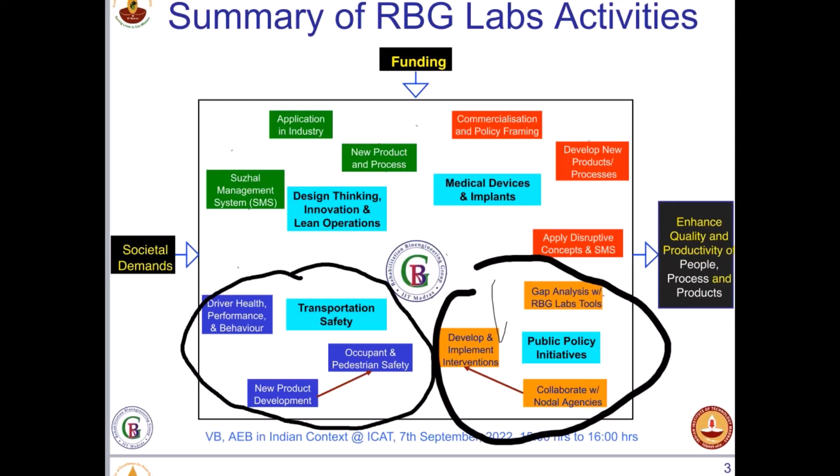I think for some reason the slides are being projected from your platform, and in that process it's taking away some of the things that are written. But anyway, okay, so organizers, could I just drop off? I'm going to make a PDF of the slide so it becomes easy to project, because the document is not coming out right. I'm going to drop off and come back in.

In the meanwhile, if I can have a quick spread in terms of what are the things that excite people, I'll be happy to take a look at it.

Yeah, I think I will have to drop off.

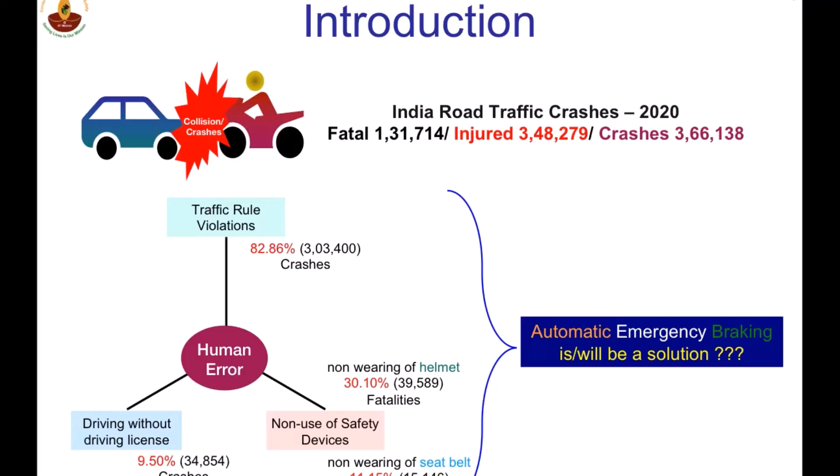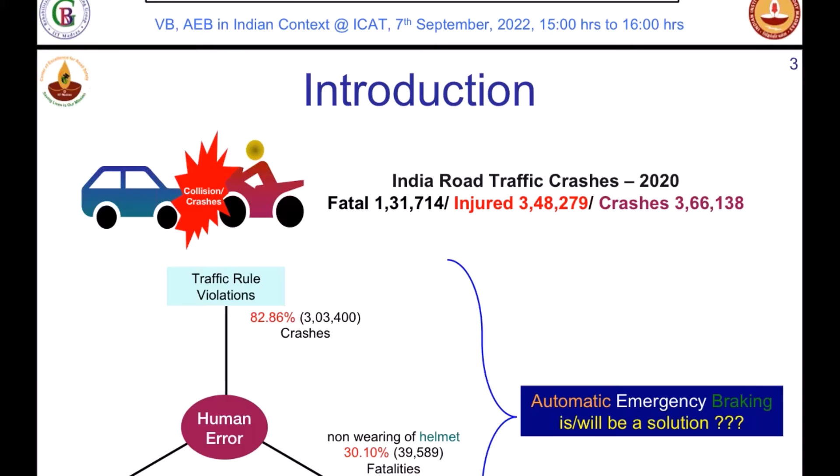So roughly we operate with a number - although we project this, we operate with a number that we have about 5 lakh crashes in the country. Now, a large chunk of it has been associated with human error and traffic rule violations that needs to be there.

Now, there are other issues like non-wearing of helmets and other compliance issues, driving without license, and other things. Now, a question that this PSL team had brought across and we were thinking about was...

for these kind of violations, which actually lead to a large chunk of accidents, whether this AEB is going to be a solution, or AEB is just going to be a technical gizmo for engineers to project about. I just wanted to set up the framework that is there.

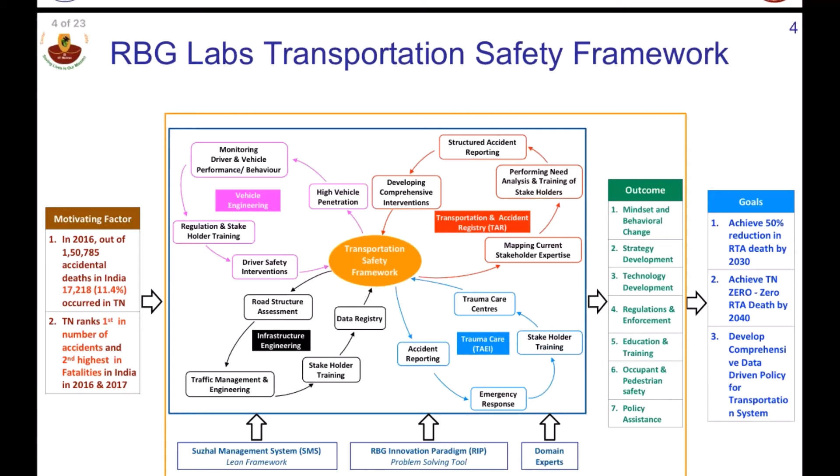So it all starts with something that we started about. Whether the data is right or wrong was not clear. It's not clear what's the vehicle engineering side. There is work to be done in infrastructure engineering and trauma care.

So basically, road infra engineering, human engineering, road engineering, and data collection - all these three things is the essence of what we need to do. Is the safety framework we built. We started asking these questions to see how we can reduce crashes and other things.

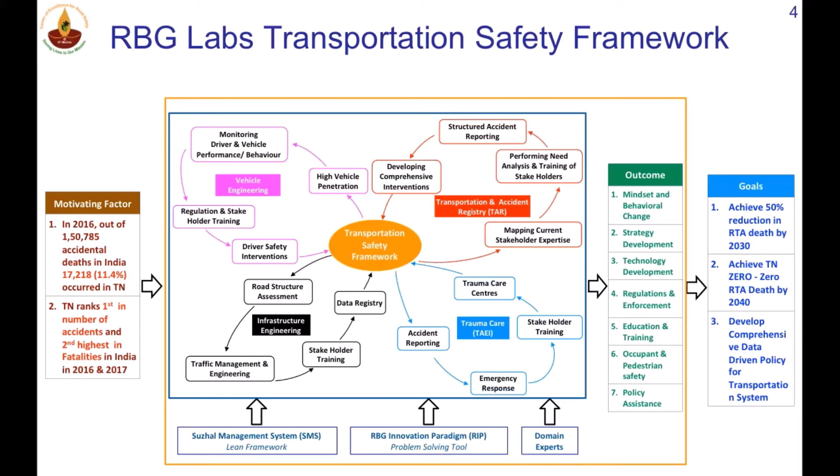So we run a program called the IRAD. Now it's called the EDAR, for collection of crash data and things of that sort. But more importantly, we are also a center of excellence for road safety, where we look at many things.

One of them is the knowledge sharing work that we tend to do, and make sure that we are able to share things that are going to be useful for many - and that's definitely an area of interest for us as we go about.

Now, we come back to the short thought of what is an AEB. There is a...

myth that all of us tend to believe - that if a car can actually detect what is there on the road and do all the activities that are expected, and becomes autonomous by itself without any human intervention, we will then get into a safe space.

So there is a significant amount of investment that goes into it. There is a lot of impetus and spend that happens to create autonomous vehicles.

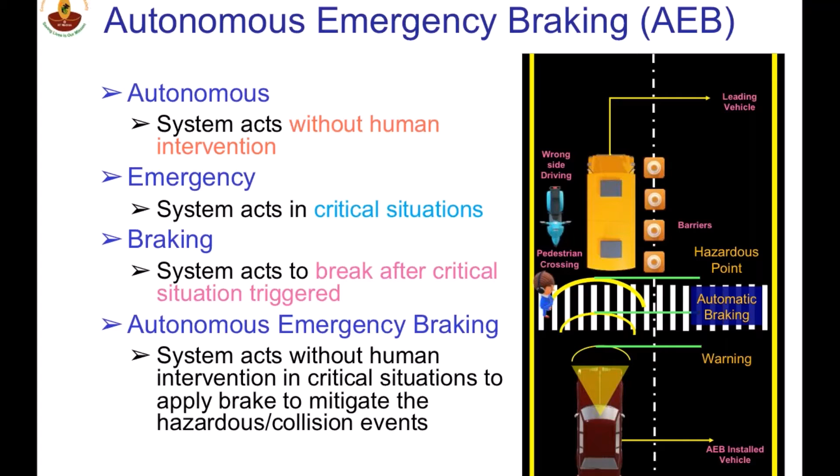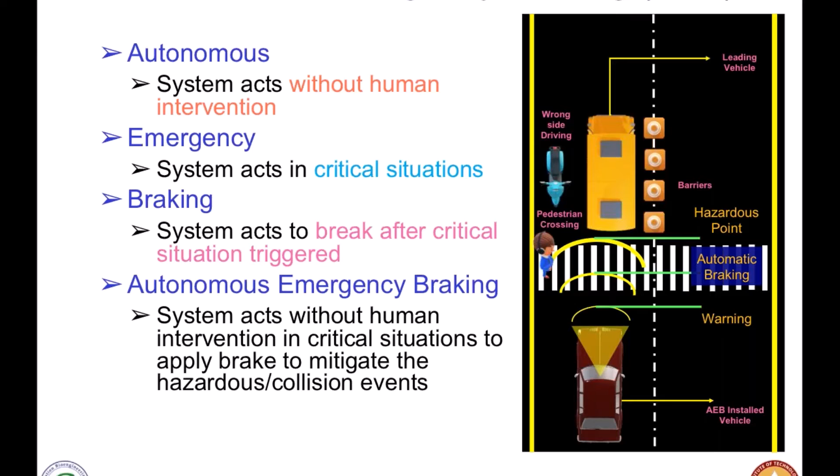So autonomous vehicles are a bunch of systems that act without human intervention. That is what any autonomous system is. The emergency is when there is a critical situation that arises, and braking is to brake when a critical situation is triggered. So the whole idea of autonomous emergency braking is, if there is a critical situation that comes out, and there is not enough time for a human being to react.

Now, what is the time for a human being to react? If there is a signal that is given to an individual... I'm trying to get the pen to write. Let me see if it writes.

So there is a processing unit and a sensing unit, and the actuation and sensing are usually nearby. When information goes out from the sensing unit and gets processed, and then an actuation signal comes out, there is a time lag that happens. Typically, this to and fro time lag is said to be around 600 milliseconds for a healthy adult. Now, 600 milliseconds is quite a bit of distance, distance as in the distance traveled in that time. In that time, how much distance the vehicle would have traversed on the road.

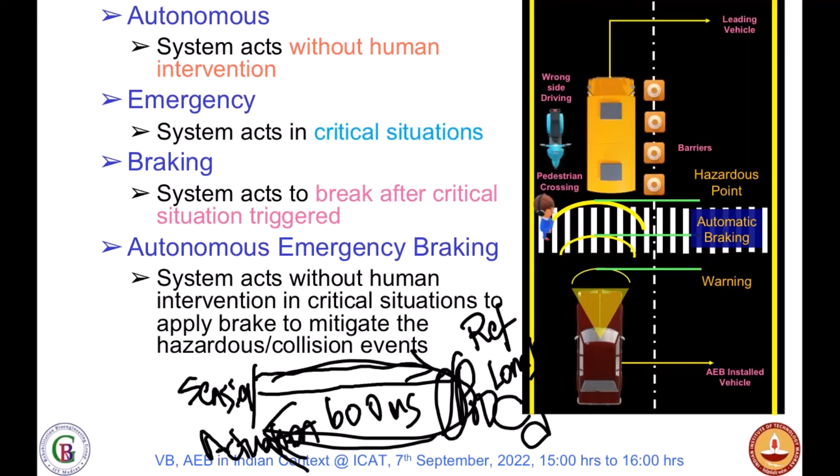Now this processing involves two kinds: one is reflex, one is computation then decision making. If it is a reflex, then it is 600 milliseconds, start, go. If it's some level of computation you have to do to arrive at a solution, maybe a little bit more is added. But once you push into the territory of decision making, it becomes an extremely difficult task, for the simple reason that the human body's decision-making part is a challenge that is very difficult to mitigate, because all of us are indecisive. We tend to be fairly indecisive in whatever we try to do, whether we're good or bad at it, we tend to be very poor in decision making. So the time lag takes significantly longer, and as the decision-taking time increases, it creates significant other issues.

Unfortunately, I did not know how to do an erase in this tool, so I decided to do the undo to erase it.

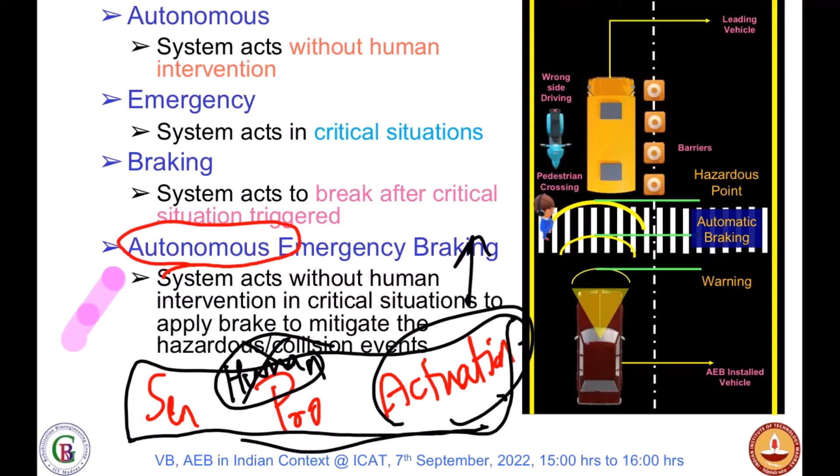Anyway, so what engineers try to think is, let's not worry about this, let us actually start looking at removing the human in the system, or removing the human from the loop. So there is a sensor, the processing, and the actuation that needs to be there. So there was this black hole called the human. So we remove it, then it happens within the machine itself. You sense, you process it, and you make the actuation. Now, the actuation part is the braking part, and sensing is what you sense for the emergency, and you want to build autonomy in that and take it forward.

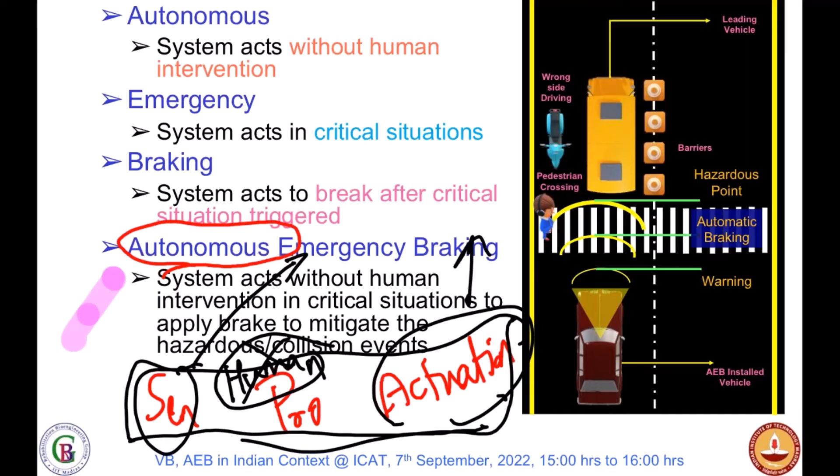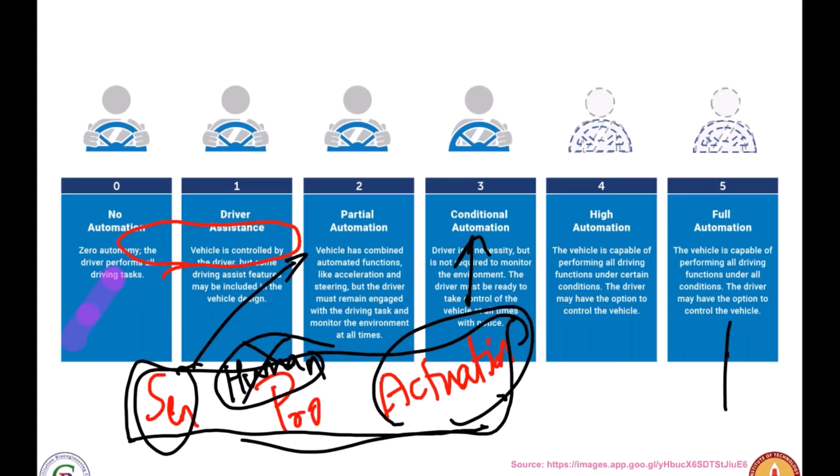As I said, I want to take this from first principles, take a look at it, and then go into it. In vehicles, over a period of time, we all love to create, we would want to be absolutely certain about what levels we create structures in. So creating structure is something we all love to have, and to create the structure, the good old traditional car, which is fairly plain vanilla with no automation, your Model T from Ford, to many of your first cars, most of you would have seen better cars since.

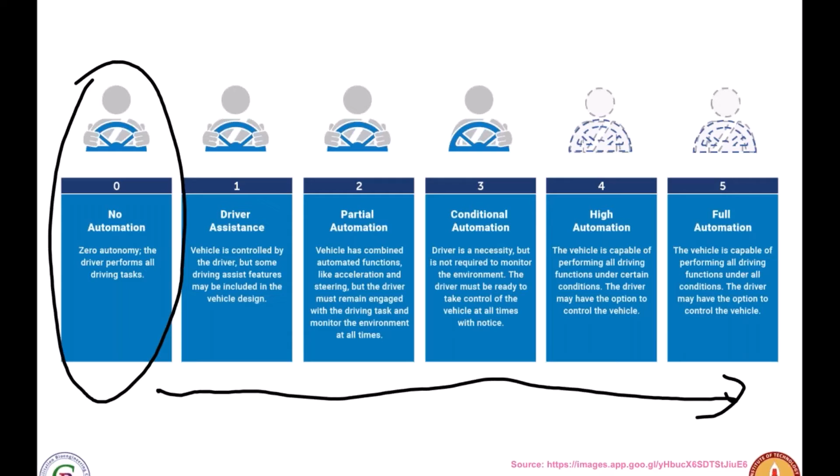Over a period of time, you start asking what kind of driver assistance you would want to add, where the driver is still in control, but you start giving features that can help the driver decide what needs to be done. So there is processing by the human, there is human involvement or intervention. Now you go a little further and say, I won't ask you all the questions, I'll ask you some questions, and you can answer and still work with it. Functions like acceleration, steering, something like cruise control, which are partially automated.

Then you start bringing in conditional automation, where the driver is not required to monitor the environment, and the driver must always be available to step up and take over control. So all these have the driver in the loop. Now you want to add a bit more automation: the vehicle is performing most or almost all of the driving functions, and although the vehicle can work on its own, the driver can always step in and start controlling the vehicle.

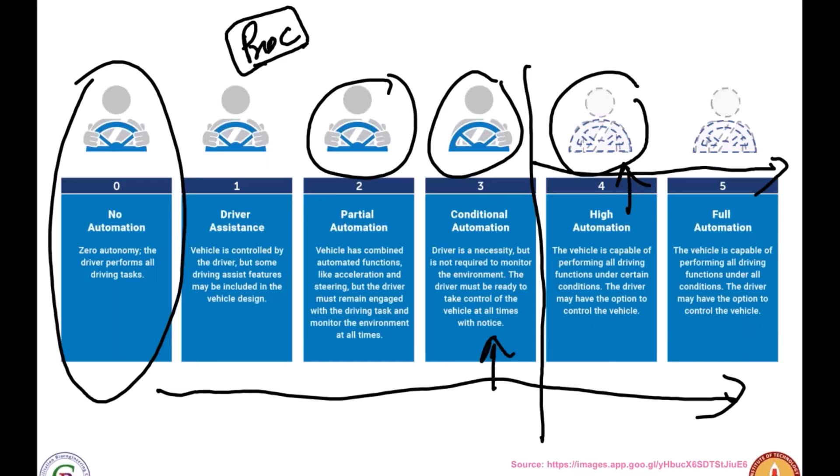Of course, when you go full on, it's a driverless car, which is kind of the holy grail that many would want to approach and then get into. Now, where does AEB fit into it?

Many times people always talk about the acceleration that your vehicle can bring about. But injury and failure does not happen because of acceleration. That happens because of the deceleration, right? So how fast you brake, and whether you brake on your own volition or you're being braked by extraneous factors. Injury is not due to acceleration, injury is always due to deceleration. And in the deceleration, if it is not controlled properly and the systems within the vehicle are not working together, then you are in a big soup.

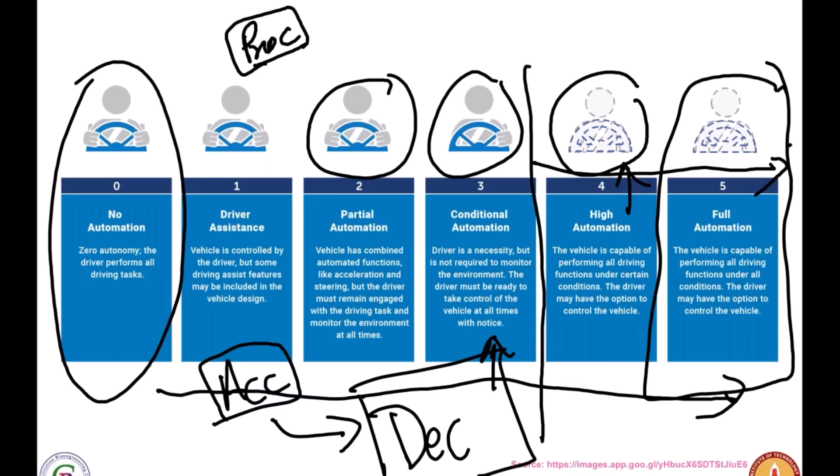Therefore, this entire braking business becomes a... okay, now I've figured out how to erase all drawings.

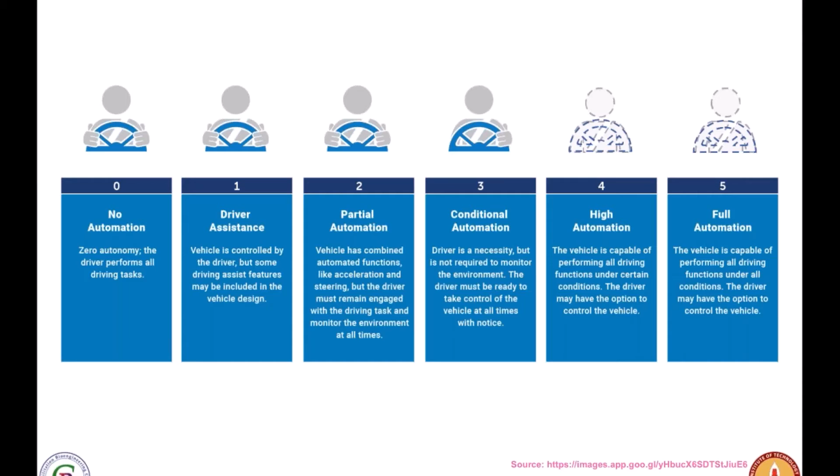So it becomes much easier, and it becomes an easy thing to work with.

Now, the AEB as a system has been around for a very, very long time, it's not a new concept. It's probably in the late 40s and early 50s that people started looking at it, but most of it has been about reliability, bulkiness, and other things.

So again, you can try to correlate it with the availability of electronics and the improvement in electronics. It's not that people were not imaginative, it's because the science, or the electronics and computational power, had not moved further.

But with the advent of the 90s and 2000s, miniaturization of radar or LiDARs, laser-based detection, distance detection, and the reliability of this LiDAR. Today you can measure with a laser-based device for 10,000 rupees. You have laser guns which actually measure your speed, distance, and closing-in speed, meaning it also has Dopplers into it, and you can measure a vehicle that is going to move. A majority of what the cops tend to shoot at you to find out your speed and other stuff.

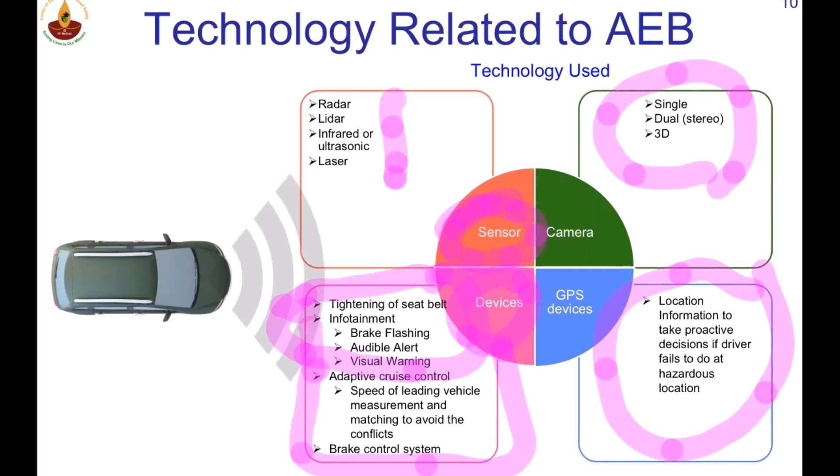All this is about the human in the loop, and then of course the vehicle-wise, the cruise control that you would want to do, and the brake control systems that you would want to get in play so that you can have good control of things that are to be done.

Now, like all systems, what is the good and bad end of the thing? The good thing always is, a vehicle, we can assume that the guy who drives it is an idiot, and the vehicle is smart, therefore smart vehicle will not harm the passenger. So we trust a lot on vehicles and the autonomy and the intelligence in the vehicle.

So the idea here is a vehicle cruising at about 60 kilometers per hour hitting a pedestrian has almost near certainty of death, compared to a vehicle that has been braking and not hitting the person at 60, at a lesser speed.

If a driver has missed a person who could be walking, or the intent of a person who could be walking, that leads to pedestrian crashes, head-on collisions, single vehicle crashes, rear-ending, as well as fixed objects. That's a single vehicle crash - there's an object standing there, not moving, and we, being arrogant, believe our vehicle can get the other thing hit and pushed open and go forward, but it won't happen that way.

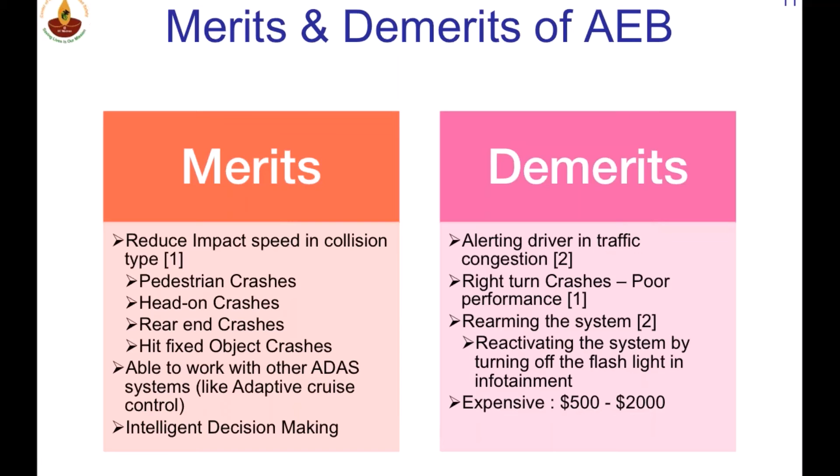We would spend a significant amount of money, but AEB will be an equalizer that would come about. Now, the talk is to make it mandatory by April 2023. Again, don't hold me to any of it - if you know a better number, I'll stand corrected.

AEB in an Indian context will be great for a lab level demonstration, but it will be a while before we can throw it on the streets. A bigger challenge in the Indian context is our human behavior - it's extremely complex to model and bring in. Basically, the AEB is going to work because you have built human behavior models, and those models or rules have to be obeyed. If that is not happening, we are going to be in trouble.

So the unavailability of the intelligent transport system also adds up to this challenge. Of course, there is climate condition that is unpredictable, and so on and so forth.

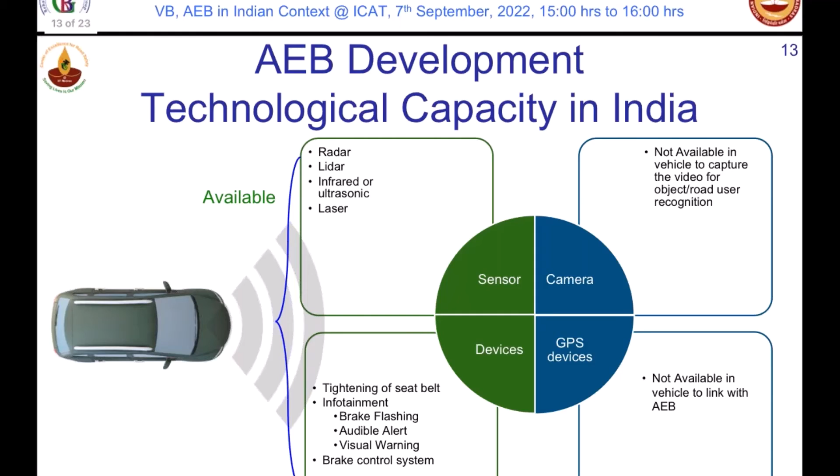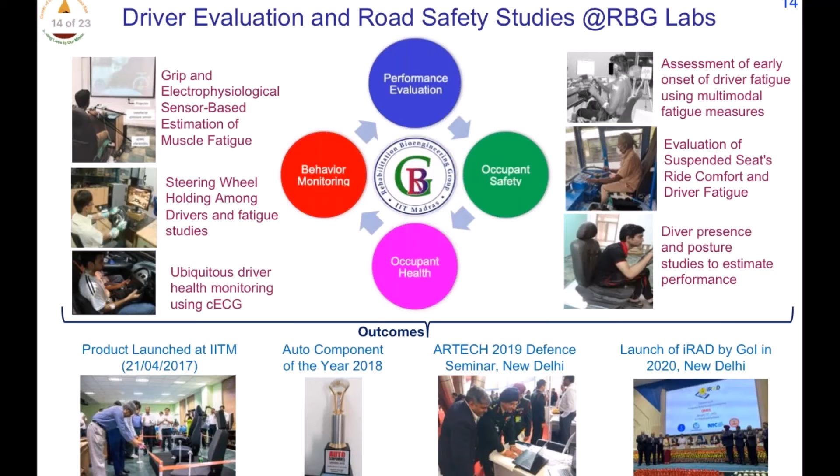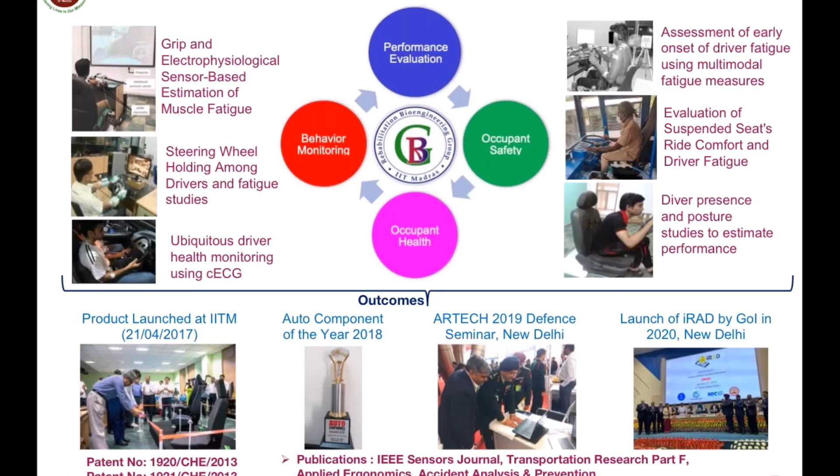Anyway, over a period of time, our lab has been working on the sensing side of the business, a little bit on the processing side, so that we eliminate this thing. We hold a few patents around how different sensing mechanisms could be computed to create a warning system in terms of driver behavior, performance, and other stuff. One of them is also a product called IntelliSeat. Unfortunately, because I flipped to this PDF it won't be seen, but you can Google it, or check it out on YouTube as IntelliSeat. Harita is now called Minda, but the product will still say Harita IntelliSeat.

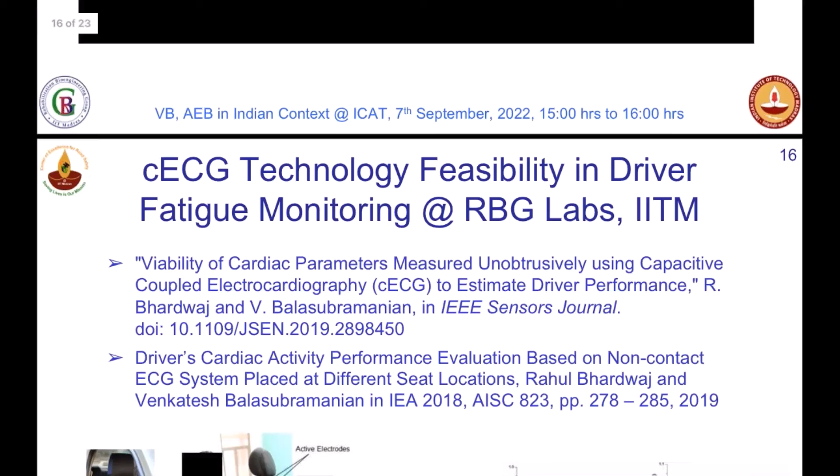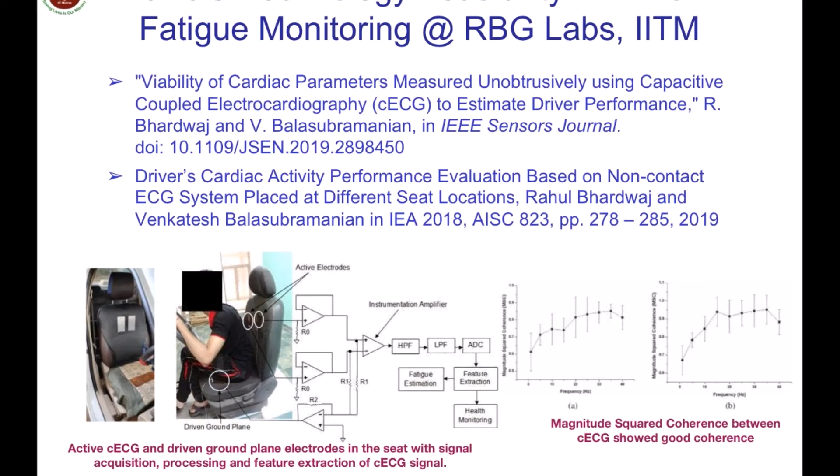The other thing that we also look at is sensing the human being - not only their presence but we start sensing their heart rate and things like that, the cardiac activity, and based on that, try to model what needs to be done. These things are largely from the human element side of the business - the driver and driver-related stuff, and how that feeds into the machine that you would want to put it in.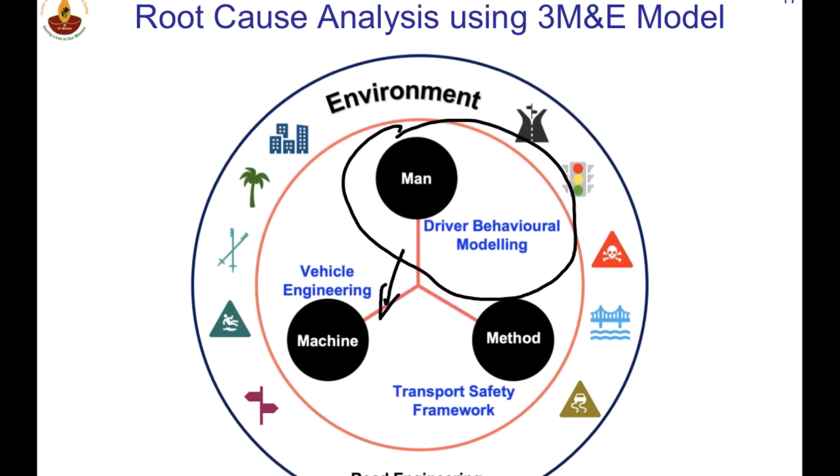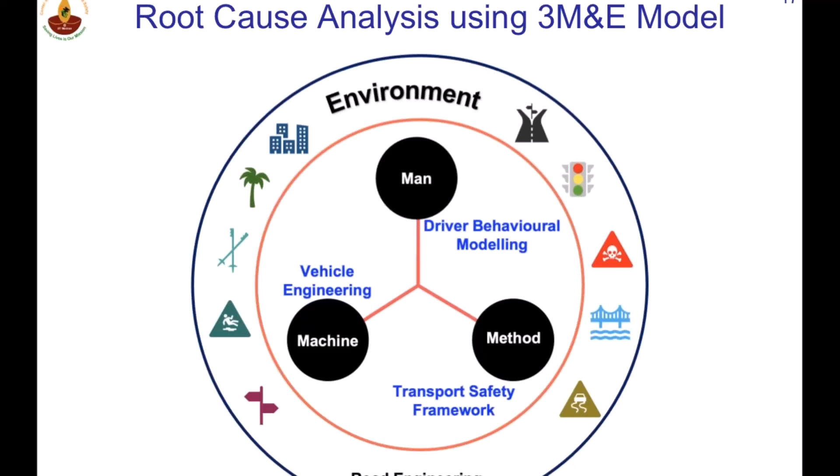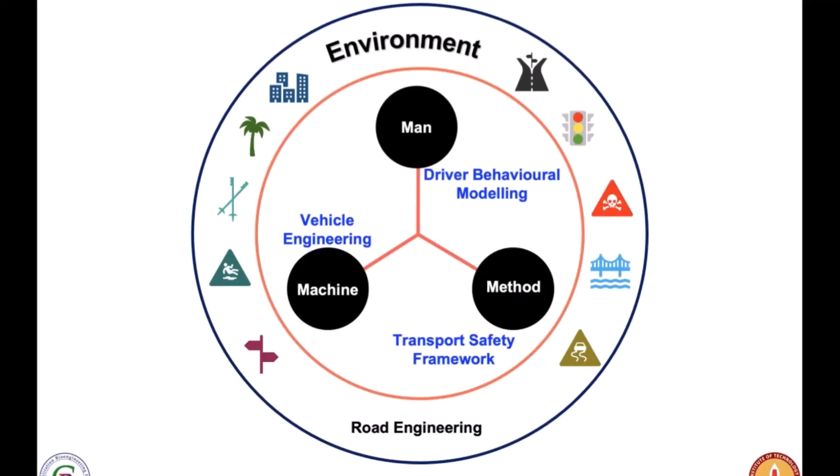Of course, there is this entire thing about how the human and the machine interact, the method that will be used, as well as how the human and the environment interact. That is going to be a bigger challenge than what we look at in road engineering that needs to be worked on. Nevertheless, understanding this 3M and E makes a big impact in what you would want to do. Now, in the Indian condition - and none of this is unique to any place - it is happening in every city, everywhere.

You put a median barrier, but a person who is slightly busy and doesn't have the time to wait or cross, or absolutely stupidly in their natural course of place, you have put something and you're asking them to spend a little bit extra energy to do something. Nobody, including me or most of you who are here, would want to do that if we can do this.

And as the stakes are increasing, the willingness to take chances or risks that you are able to, the appetite for taking risk significantly happens. Of course, in a traffic congestion like this, most of the AEB will go bonkers. It would probably kick in and say, hey guys, this is not in my world. Go back and start working on your way to do.

Of course, we have sometimes excellent weather, but sometimes we do also have weather like this. And when we have weather like this, some of the systems which are vision based are going to flunk. I'm sure a lot of you would have seen enough videos of expressways in which, in absolute darkness, vehicles were banging each other because they couldn't see the vehicle in front till they hit it.

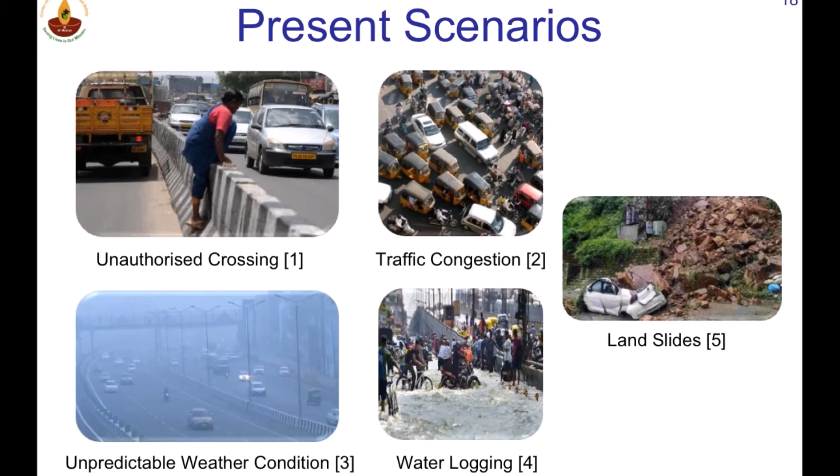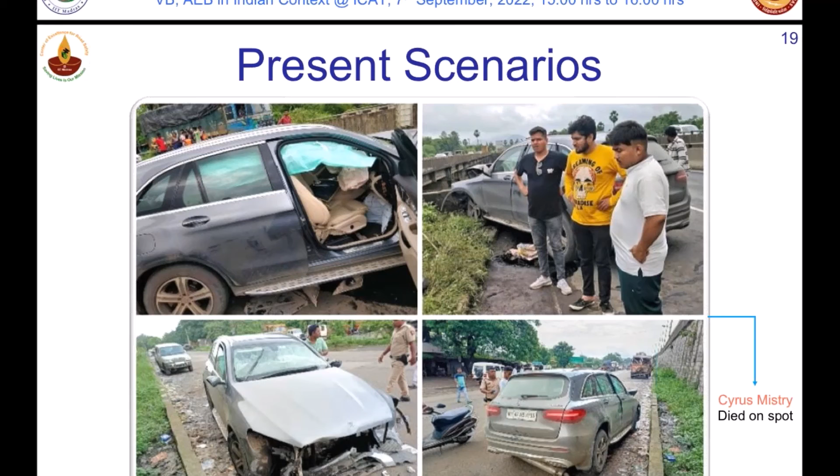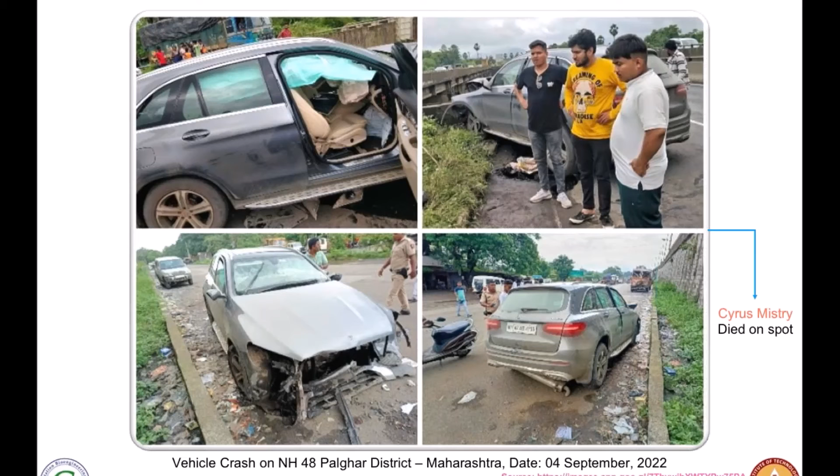This adaptive cruise control and all were there on the Surya Setu as you are coming to the bridge. This is not the first car to cross the bridge, right? But this is probably the first car to go and kiss the bridge, whatever we would call it, the masonry work that is there, which is part of the bridge architecture.

Now, did the bridge pop up without signages? Those are bigger challenges. Now, could the vehicle have stopped? Yes. These are all the places where AEB could have been a beautiful help, and two individuals were lost. This is just one case. A couple of weeks back, a crash we were investigating had about 10 people die in a crash very similar to that. It's a 4-lane suddenly becoming 2-lane without signage, and people do die, right?